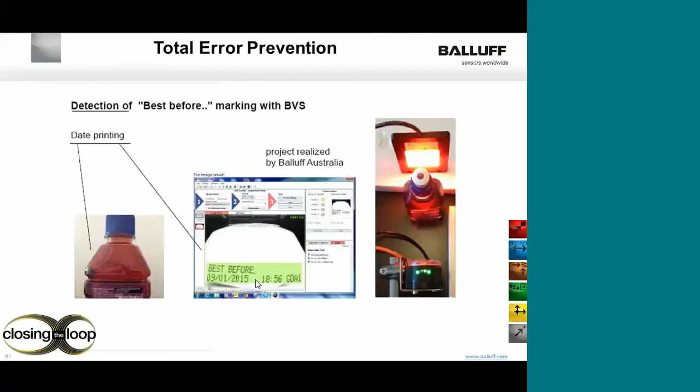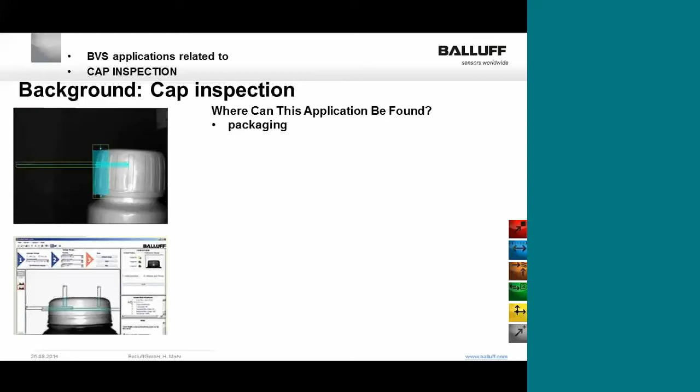Other ideas where we can look at using our Balluff vision sensor is for cap inspection, and this opens up a market to you in the packaging area, pharmaceuticals, medical, and any other area that does bottling systems. So that could be in the food and beverage industry as well.

So what can we do with our vision sensor is, well, we can certainly detect the presence or absence of the cap. Customers will want to make sure that the cap is correctly seated. So if it's too high, then that could cause leakage. If it's too low, that could cause damage to the cap and that it's too tightly torqued. Or if it's cocked to one side, that could also cause leaking problems and cause contamination to the product that's inside the bottle.

Thirdly, the security ring, if that's missing or if it's cut or broken, we'll want to detect that to ensure that the product is safe for our consuming customer.

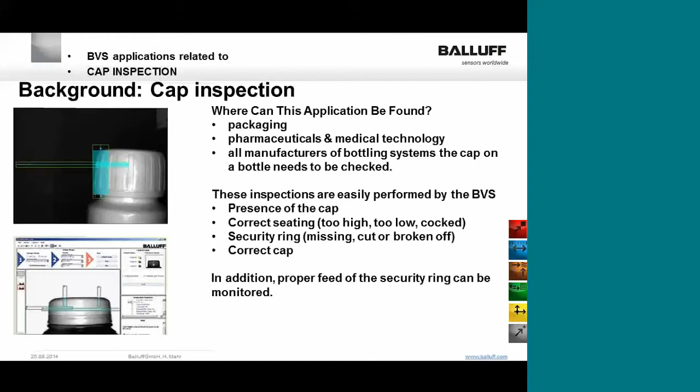And in some cases, there may be different types of caps for a common bottle to signify different products. So is it the right product for the right application? We can look at that a little further down the line, the proper feed of the security ring can also be monitored.

Here is an example of, again, the correct seating of the cap, the type of vision sensor that's been used. And you'll note here in the center that there's an IP67 enclosure that the vision sensor resides in, so they are able to adhere to the IP ratings of the environment that the vision sensor is to be installed in. In this case as well, they're using a background light, just the back plate here is being used as a background light.

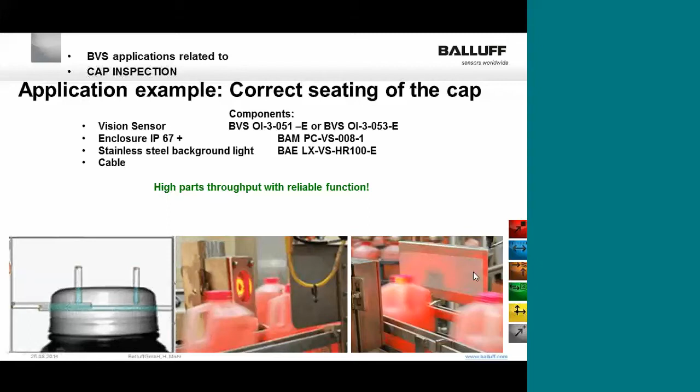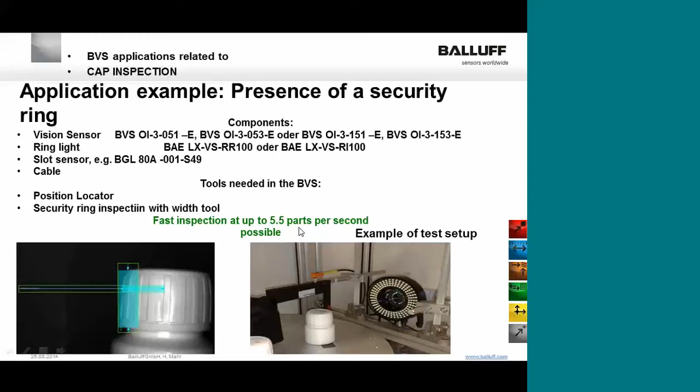The next application here is talking about a security ring. This is an emulation of inspecting the presence or absence or a damaged security ring, and note that we're able to do that inspection up to 5.5 parts per second, which is rather high speed.

The next slide here is actually a quick little video of that application. So you'll see that we have a gate sensor here, our BGL sensor, and that's triggering our lighting and our vision camera to be inspecting that particular product.

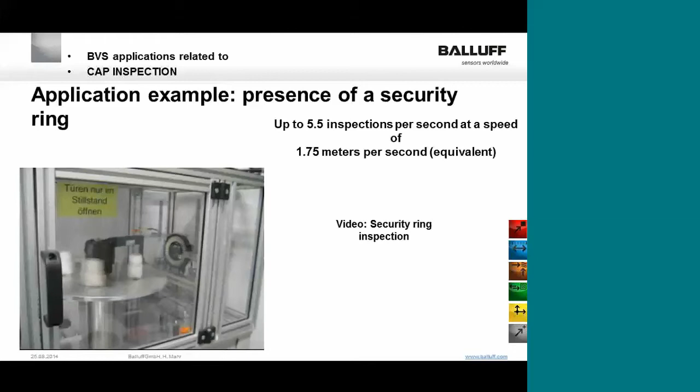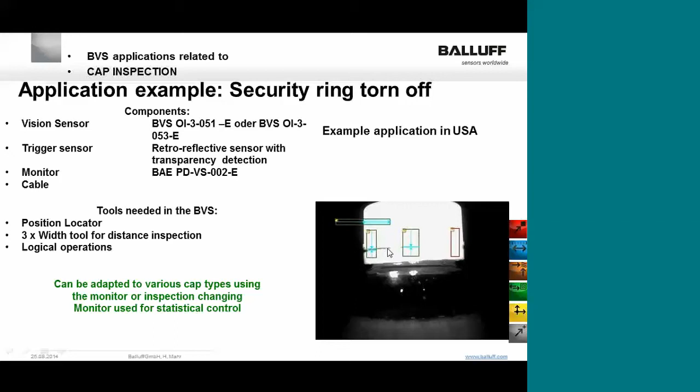Certainly pharmaceutical is a great application for looking for the presence or absence of a security seal. And this is just that. Here you can see the security seal on a cap has been breached. Our vision sensor is able to detect the presence or absence of that seal.

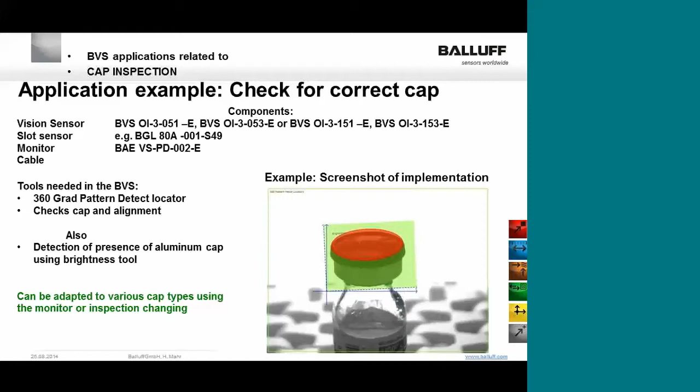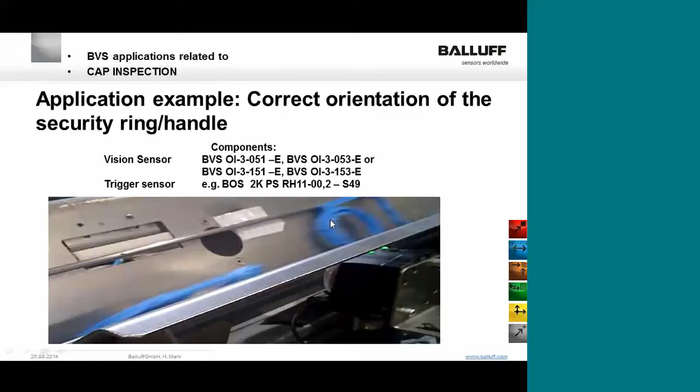In this case here, we're showing security rings, and also it's a security ring and a handle that's traveling on this conveyor, and they'll want to make sure that this security ring is orientated in the correct way. So we're able to detect on the fly that the target is correctly orientated.

And in this example, we have another video for you. In this example, we were competing against both Omron and Cognex, and we were found to have the better solution out of the three vendors.

So whether it's right side up or backwards, we're able to detect on the fly the correct orientation of the security ring and handle.

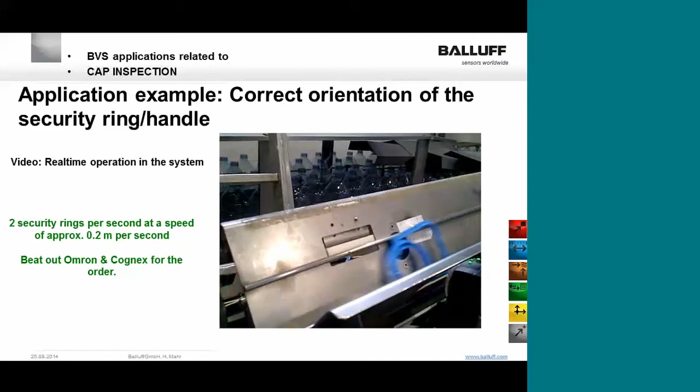The next application is also a food application. In this case, we have pretzels moving down a chain link conveyor. In the bottom of this device, we have a sodium hydroxide solution, essentially a salted solution, that's being sprayed over top of the pretzels. We want a level control application where we're able to detect both high and low level, so that we have a proper amount of material in that container.

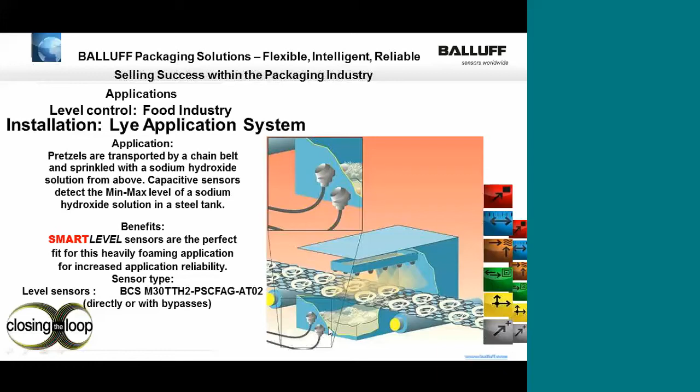Balluff is able to do that using our Smart Level capacitive sensors. These sensors will not false pulse when seeing foam, nor will they falsely trigger if you have a viscous material adhering to the wall of the container. Using our Smart Level sensors, we're able to insert that directly into the container to detect the high and low levels.

In another food application, we're dispensing a chocolate icing material onto a product. The capacitive sensor is coming in contact with the chocolate icing, so we need to make sure that sensing device conforms to food applications. We can also see that in this application the temperature is 60 degrees Celsius, so we need something able to withstand that higher ambient temperature environment.

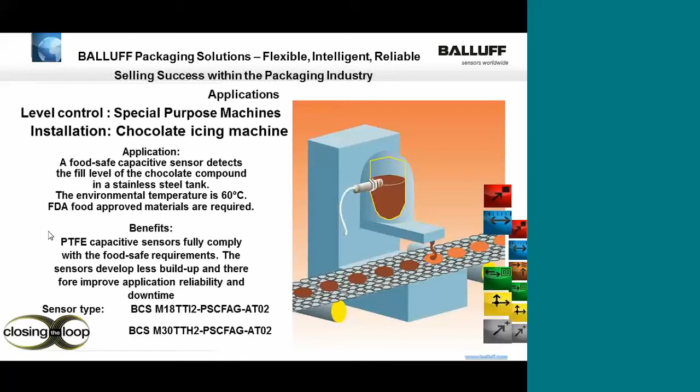Balluff has food-safe sensors, specifically capacitive sensors. Their PTFE, or Teflon-coated, sensors are able to be used in food-grade type applications.

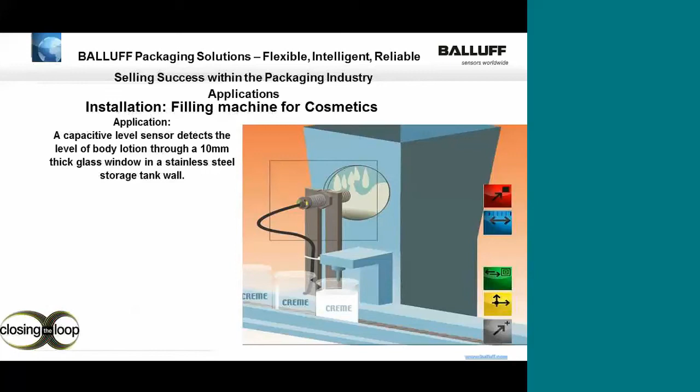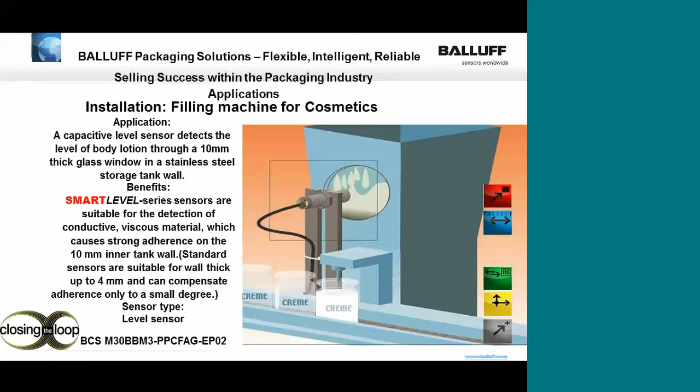Here's a cosmetic application where we're looking through a sight glass inside a hopper to look at the high level of cream in that hopper. As mentioned earlier, the Balluff Smart Level capacitive sensors will ignore viscous material adhering to the walls of a container and will actually look for the true level. So this is a perfect application for Balluff capacitive Smart Level sensors.

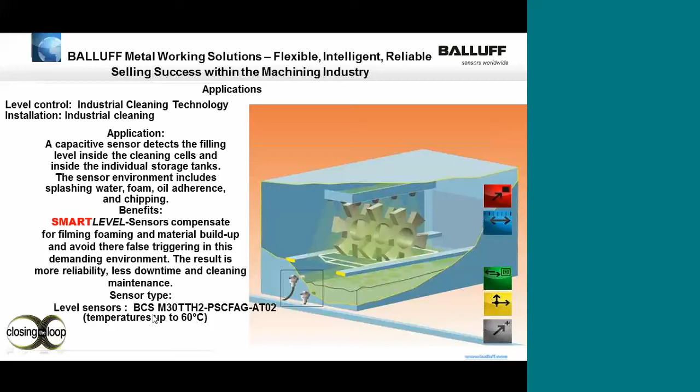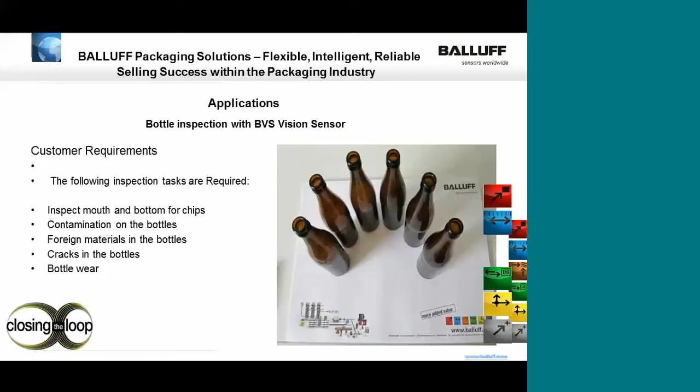Going back to vision, we've got some examples of bottle inspection. Here we're going to look at beer bottles. In this case, we have a number of tasks that the customer would like achieved. One is to look at the mouth of the bottle and the bottom of the bottle for chips. We want to look for contamination on the bottle itself, for foreign materials inside the bottle - typically we find cigarette butts and bottle caps shoved into the bottom of the bottle - and of course we want to look for cracks in the bottle and wear of the bottle from a cosmetic standpoint.

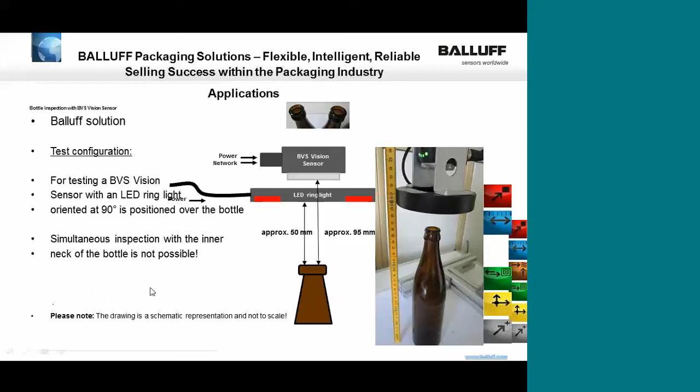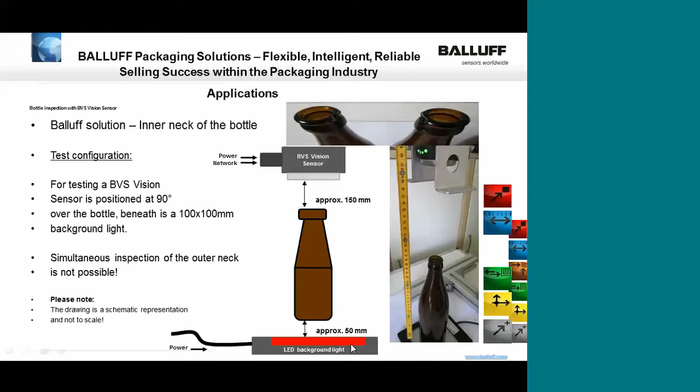We're able to achieve these, again dependent on the positioning of the sensor and the type of lighting used. In this case, we can be looking at the inner neck of the bottle or outer neck inspection of the bottle - so we can do both inner and outer neck inspection. Note here that when we're doing inner neck inspection of the bottle, the LED or lighting is coming from the bottom. When we're doing the other type of inspection, lighting was from the top.

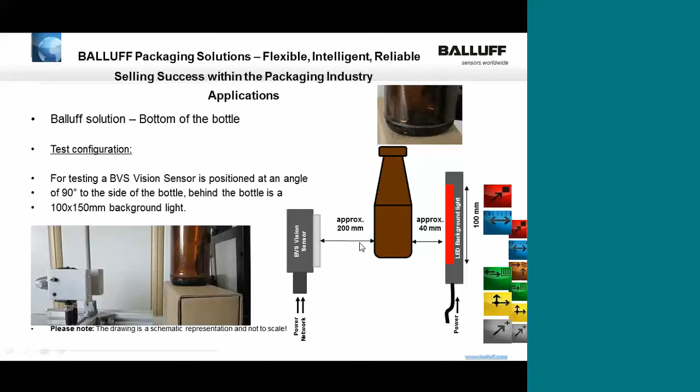Here we're looking at inspecting the bottom of the bottle. So we have a background light, and the BVS would be at a 90-degree angle, now looking for foreign objects that are inside the bottle.

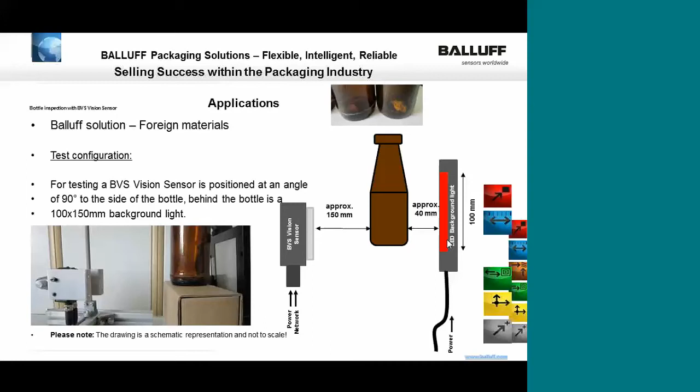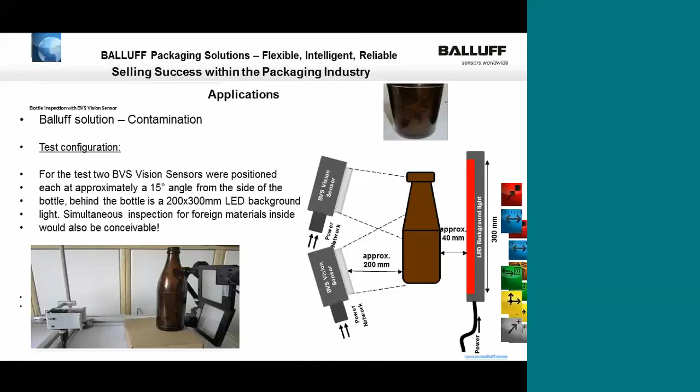The same type idea is a light at the other side of the bottle, and the BVS at a 90-degree angle, about 150 millimeters apart. There's some screenshots of that application. Here we're looking for contamination of the bottle using two BVSs at a given angle with the same type of lighting on the other side of the bottle. And this gives you an internal shot of what the vision sensor is seeing.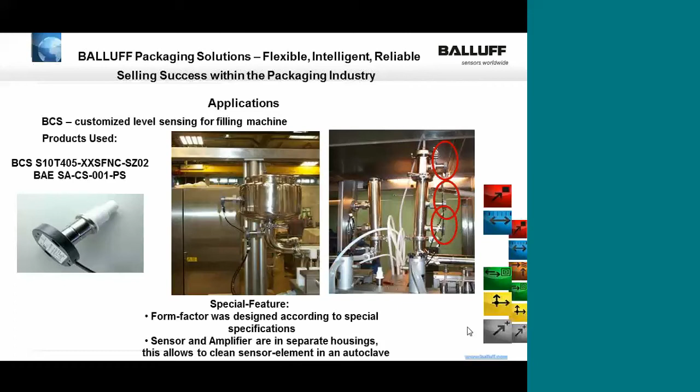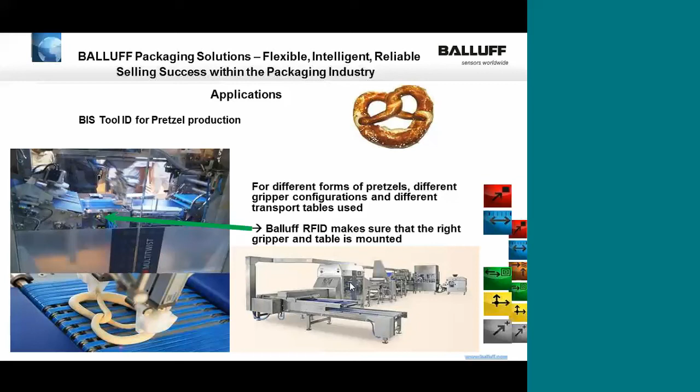In this case, we're looking at a machine that's manufacturing pretzels, and what they're showing is how RFID is used in this type of manufacturing. So the RFID tag ensures that the proper gripper and table is mounted, as depending on the product that they're manufacturing, there would be different grippers and different tables used. Before they manufacture that particular product, they're able to confirm that the right gripper and table is assembled onto that manufacturing line. So this kind of goes into RFID for proper tool change.

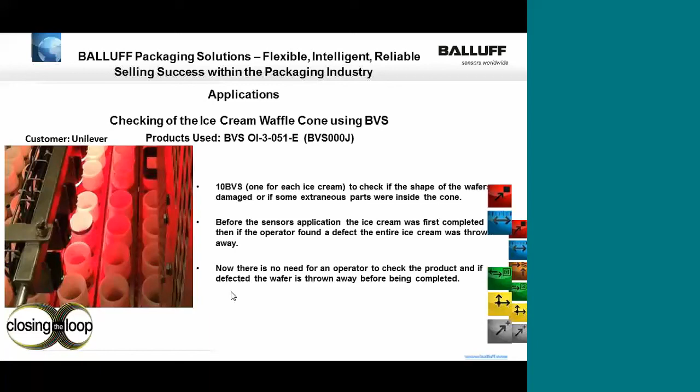In this case here, you'll see a row of BVS cameras that are looking down the neck of ice cream waffle cones. We want to make sure that the shape of the wafer is proper and that it's not damaged, or that it's there. This way, they're able to ensure that they're not dispensing good product into wasted material or damaged material. So on this particular application, there were 10 BVSs in a row on this line inspecting every filling station of where that waffle cone is present.

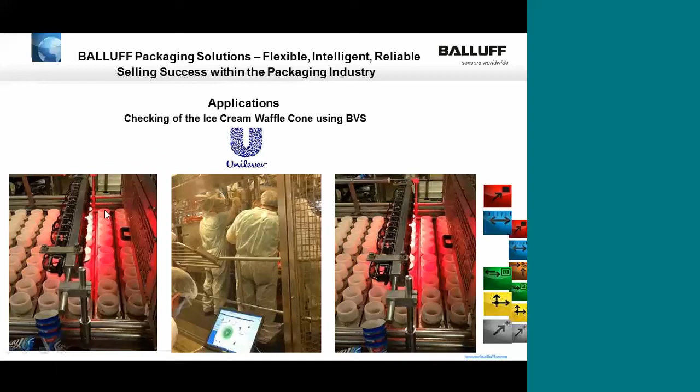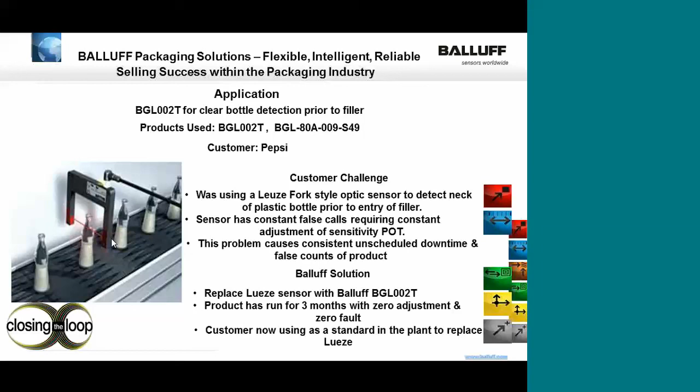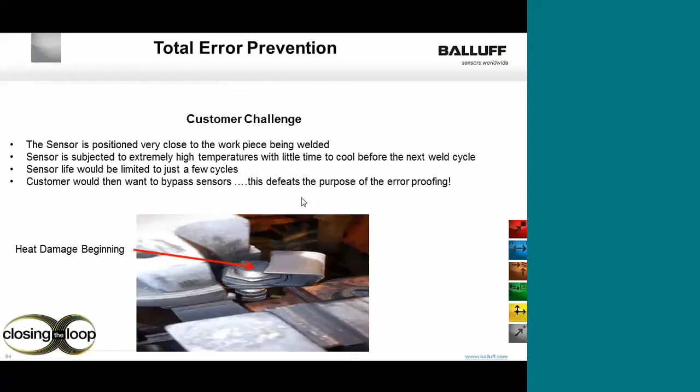And this is an application showing Balluff's plunger prox being used in a MIG weld cell. So the customer had an issue where the sensor was positioned very close to a workpiece. So as the MIG welder came by, there was direct heat transfer from the workpiece to the sensor. And in a very short time, there would be heat damage transferred to the sensor. This was so severe that there were only a few cycles of operation before the sensor failed. So to get around that problem, the customer began to bypass the sensor, which obviously defeated any error-proofing efforts that the company had in place.

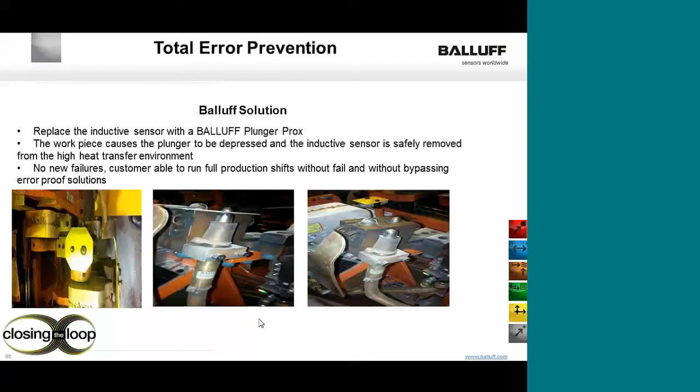So to get around that problem, the inductive sensor was replaced with our plunger prox, which you see here. And when this particular plate was placed onto this fixture, it depressed the plunger prox, causing that device to turn on. So since they've done that, there's been no new failures. They're running their full production shifts without fail, and there's been no need to bypass any of their error-proofing.